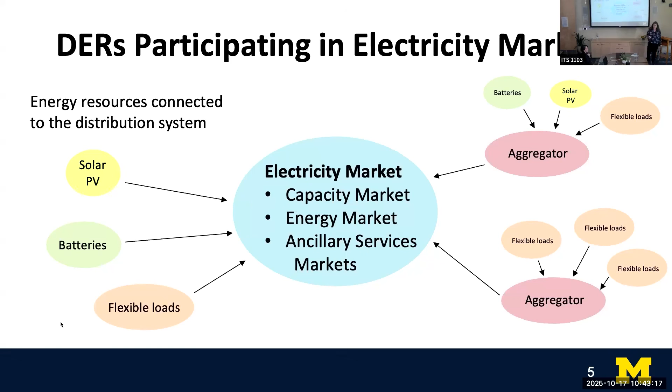Okay, so how does that actually work? So the way it would work is that an aggregator wants to interact with the market operator or the independent system operator. This is the entity that runs the grid. So the example here is the California independent system operator. So what they would need to do is say, I have this big resource and I want to offer it to the grid as a resource. So I'm going to bid into a market.

And then the market operator dispatches the resource to do something specific for the grid. And this happens in advance of real time, so often day ahead or hour ahead, this transaction happens. And then after the aggregator is dispatched, they're ready and waiting to actually deploy the resource.

And so the aggregator, in order to enable this, has to have a contract with different consumers. So the consumer could be a residential home, it could be the commercial building owner, it could be a big battery plant that's connected in distribution, et cetera. So the aggregator says, come join my aggregation. I will pay you for it. In exchange for that payment, you have to follow my commands when I'm deploying commands to change power consumption or production for your resource. So in real time, that control or coordination happens, but the contract is negotiated in advance. So they agree on terms.

And the consumer has a strong interest in protecting their equipment. So they'll also put in place constraints. It says you can't do this at certain times, or you can't do it too much because it might affect me. If the resource is a flexible load like an air conditioner, the consumer might say, I only want my house to fluctuate in internal temperature between this small range because I don't want to be inconvenienced. So that could be an example of a constraint.

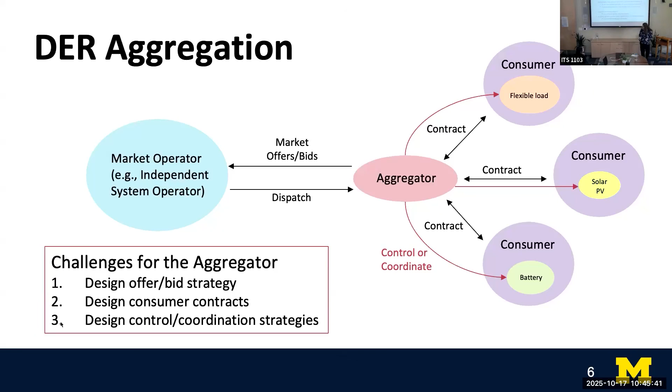And they also have to design a control and coordination strategy. How in real time do I actually deploy this resource to behave like a virtual power plant? And so most of my work actually focuses on this third one, the control and coordination piece. So when you dig into DER control and coordination, if you want to coordinate different distributed energy resources, you have to figure out how you're going to do that. What kind of mechanism are you going to use for control?

So you could send electricity prices: make the price high, it reduces consumption, increases production; make the price low, vice versa. Or you could send commands, you could say turn off, turn on, move to this state of charge. Or you could send instructions that are even more complicated. For example, you could say do this specific thing only if you can do it because your current operating state is here. You could do something more complicated, but that might give the DER more flexibility in their response.

Okay, so those are the many ways we can coordinate these DERs. Prices: a lot of people say we should do everything with prices and markets. We should deploy electricity prices that change over time, and we should get responses from resources based on prices. However, price response is less reliable because people have to be paying attention to the price in order to respond. And there's also the possibility that you could get synchronization through prices.

If everybody's seeing similar high prices at the same time, everything could change their production or consumption in the same way. So you have to be careful of that, because synchronization of behaviors across DERs can also lead to physical oscillations in the power grid where the voltages start to swing and the currents start to swing, and that could actually lead to a blackout if you did it very aggressively. And there have been papers that have shown that.

Commands or instructions, when you're more explicit and more direct, as to, I want you to turn off or turn on, or do this thing if you're in this state, are usually more reliable, but they need the consumer's trust, because many consumers don't want to give that level of control over to an aggregator. So those are the different options.

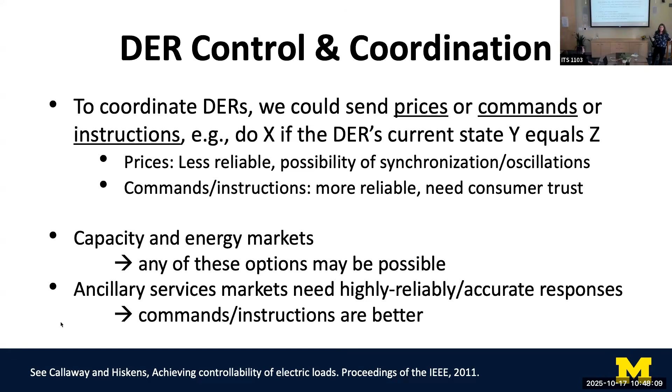Okay, so before I start to talk about my actual work in this space, I just wanted to provide this note. Recall the DERs include distributed generation, storage, flexible loads. In this talk, I'm going to use flexible loads in almost all of my examples. I've done work on storage and also solar PV, but I'm going to talk a lot about air conditioners, water heaters, and things like that.

So as far as I'm concerned, all the ideas I'll present today apply broadly to all DERs, although the specific instances of the models, the parameters, and the formulations may have to change based on what you're looking at. But I'll give you a lot of examples about loads, so make sure that you're also thinking, oh, this could be a battery, or this could be solar PV as well.

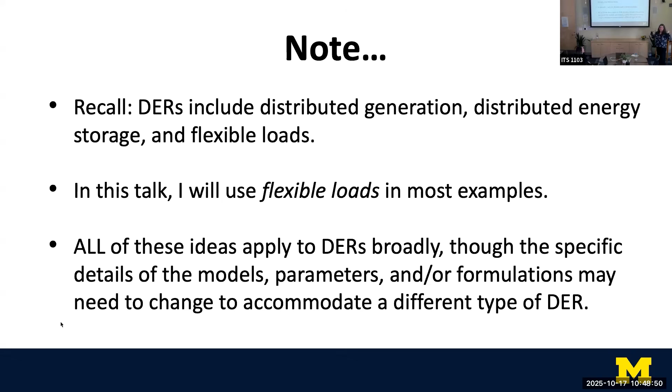Okay, so back to the outline. So let's talk about some examples of how DERs can balance the power grid.

Feel free to raise your hand and interrupt me at any point. This doesn't have to be me just talking at you, and I'm happy to stop and answer questions throughout, or just take them at the end, whatever you prefer.

Okay, so how can we balance the power grid? When we think about loads in particular helping balance the power grid, most people think about demand response programs, where you have a load responding to a signal from the grid because the grid needs a load reduction, usually. And so there's a lot of work on this about using different buildings to provide these types of load reductions, which are called load sheds.

This is a paper I wrote a very long time ago, when I was still a grad student at Berkeley, with people from Lawrence Berkeley National Lab, where we looked at how 3 different buildings were responding to critical peak pricing in the state of California. And the way those programs worked is that during the hours between 12 and 3, the prices went up 3 times, and between 3 and 6, they went up 5 times the normal price. And so it incentivizes load sheds during those hours.

And you can see the baseline is what we assume they would have consumed if they hadn't tried to respond. And the actual is what they did consume. And the difference is the residual. So you can see there's a load shed here and a bigger one there. And those are 3 different actual buildings in California.

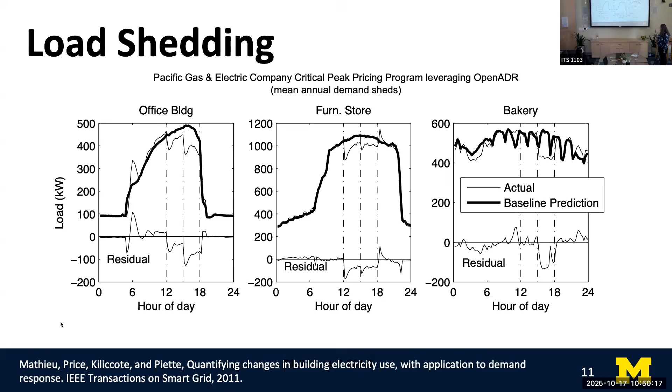The furniture store is the IKEA in Palo Alto, East Palo Alto. So you can see a lot of people work on this sort of load shedding. Load shifting is also something that we have buildings do to help balance the grid. In load shifting, instead of just reducing load, you're trying to shift it to another portion of the day when it's less critical that you reduce.

Go ahead. How do you evaluate the effectiveness of these measures when you look at the comparison between what actually happened and your prediction? The effectiveness in terms of the response to the event in this case? Yeah, I guess you've got what happened, you've got what you think will happen. How do you know if you got what you wanted to happen?

Exactly. So a lot of people compare to the baseline and then estimate the amount of, in this case, shift that you got and compare it to what you were trying to achieve. Maybe they didn't actually have a target for a shift, but they just wanted a shift, and then they can say, well, how much were we able to shift? A lot of people also do research on the accuracy of baseline models, which usually involves creating the baseline for days where you know the counterfactual, like the building didn't do anything, so that you have the ground truth.

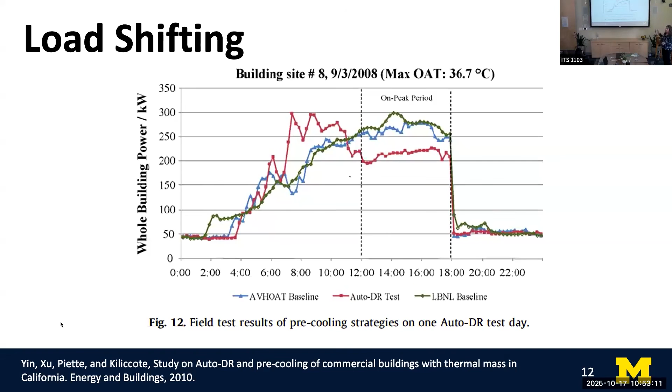So I would say load shedding and shifting are the old way of thinking about this. The way we think about this now is a much more active type of control paradigm. So in the other case that I was showing you, we were sending an open loop control signal to these resources, these buildings, and having them do something, and hopefully they respond.

This is showing a simulation of a feedback control where we're having a bunch of, in this case, air conditioners collectively try to track the output of a wind farm. So the wind is going up and down, and the air conditioner consumption is trying to go up and down with the wind. And this is in simulation. This was by Duncan Callaway in 2009, where he was showing that this was possible and that we should be using these resources in more advanced ways because they could do a lot more for the grid by doing this level of balancing of the grid.

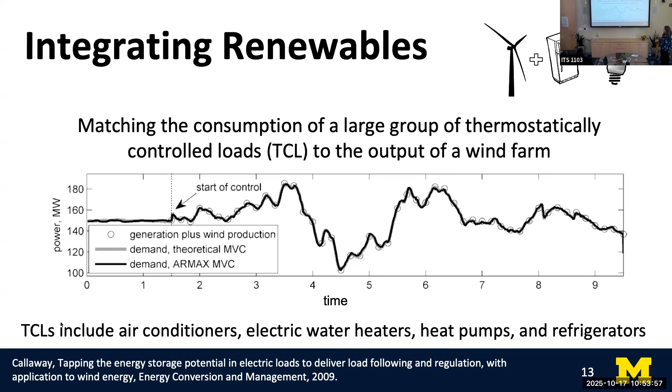And this was actually deployed, in many cases in pilot studies only. For example, in 2011, in PJM, which is the grid in the mid-Atlantic region, they used water heaters that look like this to track frequency regulation signals.

So I'm going to talk a lot about frequency regulation, but to give you an idea of what that is, the frequency of the grid is always changing a little bit, and that change is basically representing the mismatch between the supply and demand in the grid. So if there's too much supply in the grid, the frequency will increase. If there's too much demand, it'll decrease. We want them to be identical. It would be easy to solve this problem if we had lots of energy storage, but we don't. And so we're always changing generation to match demand.

So the residual piece that is hard to fix, because we can't get this exact matching, is attempted to be dealt with in the frequency regulation market, where you're asking power plants to increase and decrease their production every 2 seconds or every 10 seconds. It's on that time scale, depending on where you are in the country, to be able to fix the frequency and send it back to 60 hertz.

Could you just repeat when the frequency drops versus when it's higher, versus supply and demand? If there's too much generation, the frequency increases. If there's too much load, the frequency decreases. Okay, thanks. And too much relative to each other. So you're saying the signal comes at a rate of like 2 to 10 seconds? Yeah. So what's with the intervals that we're seeing on the graph on the slide, then?

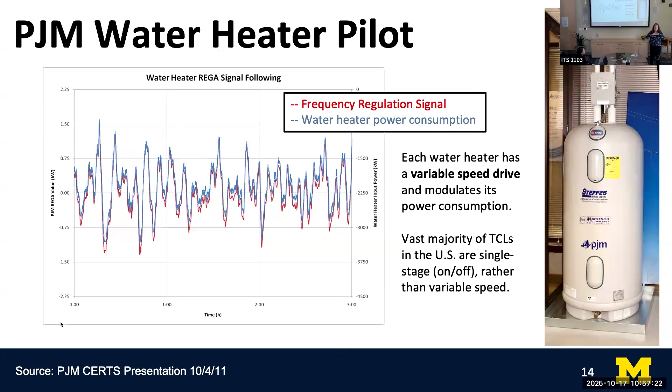So if you can continuously control power, you can do this well. But how do you do it if all you have is a device that is on, off, on, off? So an on-off device, which we'll call a thermostatically controlled load, a load controlled by a thermostat, which could be a water heater, a heat pump, refrigerator, freezer, all of these sorts of things,

works like this. So the axis here is temperature. This is the temperature set point that you set. And then there's an on-off state here. So the temperature that you set is your target for your home, for instance, if it's an air conditioner, but you're actually going to cycle plus or minus some small number of degrees. It's never going to be perfectly there.

And so the way this works is that, let's see, if it's warming up in your house, eventually you'll hit the top of what we call this temperature deadband, this area within which you want to cycle. You'll hit this higher temperature, you'll switch on your air conditioner, and the air conditioner will cool your home, and then your home will hit a lower temperature bound and turn off.

And if you look at how that's consuming power, it looks like this in pulses. So it's off, it's on, it's off, and then it keeps going. The cool thing about these resources is they already have built-in flexibility, because you're perfectly happy as long as the temperature is within this range. You're not going to notice because you're used to that anyway, it's always cycling.

So the flexibility that you can harness if you're an aggregator is that you could say, the house is warming up, but now I want to consume more power. Maybe I have a gust of wind in the system and I want to consume that. I want to take it out of the system. So I turn it on a little bit early. And then we're cooling down the house, now that gust is gone and I need to decrease consumption. So I'm gonna turn it off a little bit early. So as long as I stay in this range, I'm okay in terms of the house being the right temperature.

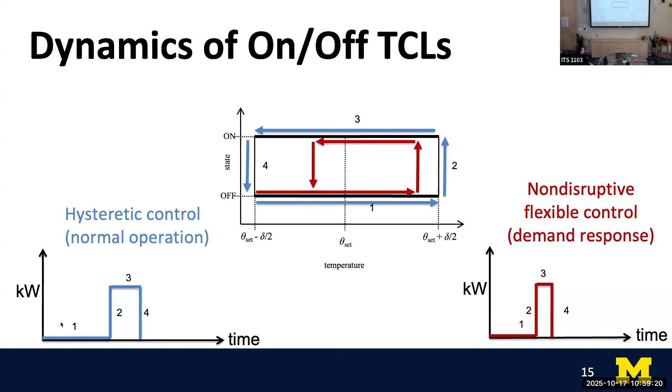I don't want to just be always cycling really fast. Do you know why? On and off, on and off, on and off. Yeah. Burn out the motor. Yeah, you burn out the compressor and the motor, exactly. So there are limitations, you can't just arbitrarily cycle. It's actually the case that if you turn it off, it usually has to be off for at least 2 minutes and sometimes more, just because it's pushing fluid through the compressor.

Did you have a question? You just answered it. Okay.

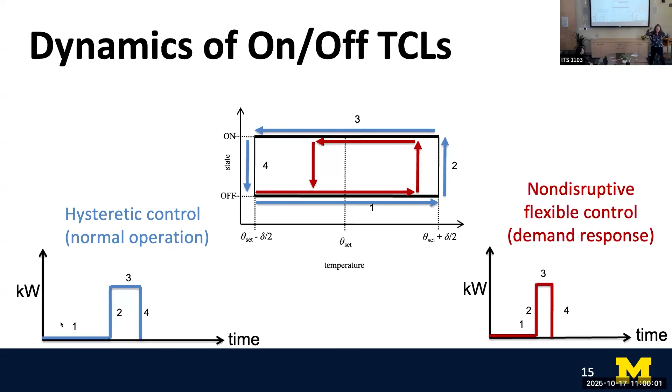Yeah, so there are limitations to this, but there's inherent flexibility built into these resources. So now this shows that instead of it looking like this, I can make it look like this, but that still doesn't help me track that very dynamic signal I showed you before. But now imagine I take hundreds of these together and I have them all do these pulses, but do them in different ways. So they each have a different pulse. So collectively they can change their consumption.

So that's the feedback paradigm that I'm describing, where you have a controller controlling a very large number of resources, hundreds to thousands. If I didn't control them, they would consume this blue line over time. I want them to track a signal, this balancing signal, which could be a frequency regulation signal. And so if I control them in ways to shape those pulses collectively, they can track that signal fairly well. That's what I'm showing in this slide. Does that concept make sense?

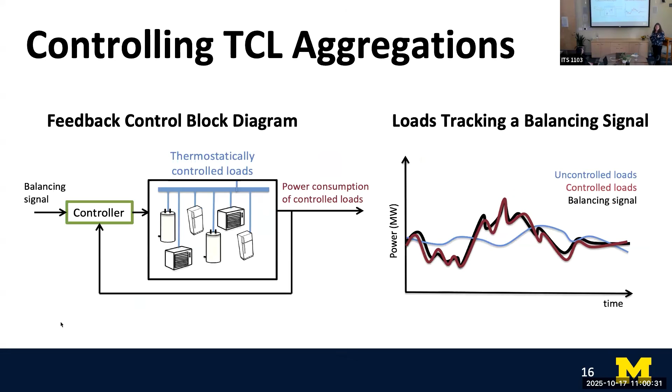Okay. So this idea is actually what I worked on during my PhD. I developed a controller to do this, but it took 10 years to implement this in practice, and that's what I'm going to show you next. At this point in my presentation, I often get questions like, this seems like a tiny resource. Like, why don't we just build a bunch of grid scale batteries and get this job done, right? It's actually quite a large resource if you can harness the technical capacity in the system.

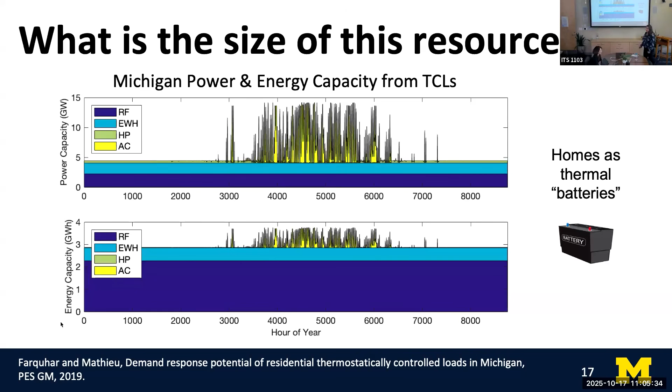I'll read the questions online too. So the question from online is, for the frequency regulation signal, is that sent out to the DERs or aggregators from the utility? And is that signal the same for all resources participating, or is there a unique signal to each aggregator, for example, based on what capacity they have to respond?

Yeah, that's a great question. The signal is sent out from the independent system operator, not the utility. So that would be CAISO, MISO, ERCOT, New York ISO. Those are examples of system operators. The utilities actually aren't involved in this kind of wholesale market piece of balancing the power grid.

And is it the same signal? So it is the same signal sent out to all resources, but the resources scale it by their capacity to respond. So every resource will have a different capacity of its response, but otherwise it's a unitless signal. And then you multiply it, like if you offer 10 megawatts, you multiply it by 10 in your case. So the aggregator gets the same signal as everybody else. And then the aggregator can disaggregate that signal to send different signals to different resources if they so choose.

Because they might know that I don't want to ask this air conditioner to respond because I know today that one's not on. So I'm not going to send that one anything, or I'm going to send different signals throughout. But they get to choose how to do that.

So the way we address this problem of designing and building and deploying this system was we built a simulation test bed where we could simulate an arbitrary number of air conditioners using very high fidelity models of air conditioners. We also modeled the distribution networks and the communication networks, and we made everything very configurable so that we could change it. And it doesn't have to be 1,000 air conditioners; it can be as many as you want.

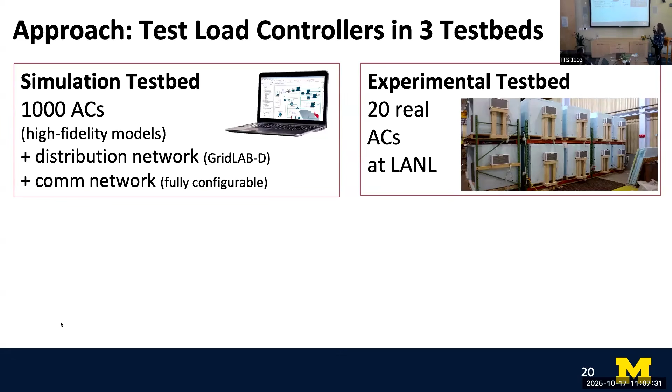And then we built an experimental test bed at Los Alamos National Lab. So the picture might be a little hard to parse, but each of these blue boxes is a model home. And the homes are stacked because we didn't have very much space. And each of the homes is cooled by an air conditioner and also has an internal heat source that was actually a water heater that we're using to emulate the internal heat load in a home.

And we actually implemented all of this and controlled everything through a LabVIEW interface, working with staff scientists at Los Alamos. And then we did a field test where we were working with partners at Pecan Street, which is an Austin, Texas-based nonprofit that does a lot of demos and energy work with a specific, relatively new community that was built in Austin maybe 15 years ago. So a lot of the homes in this community have solar on their roofs and are just happy to sign up for demonstration projects. So it's a great group to work with.

So we enrolled about 100 real air conditioners, and we built a bunch of hardware and software, and I'll explain a little bit more what that is. But the hardware was pretty minimal. We're basically just trying to emulate people's thermostats. We used data from the field test bed to validate the experimental test bed and the simulation test bed.

We were also able to run experiments on the experimental test bed that could be much more aggressive than the ones you can do in the field because you didn't want to upset these participants. But here you can do whatever you want because there's nobody there. So we learned a bunch of stuff from those very aggressive experiments and used them to improve our simulation test bed too.

And then we close the loop. Now if we want to control a population of air conditioners, 100 air conditioners isn't actually enough. If ARPA-E had given us another $5 million, we would have done probably 500 air conditioners, which actually would be a big enough resource to participate in the market. 100 is probably not enough.

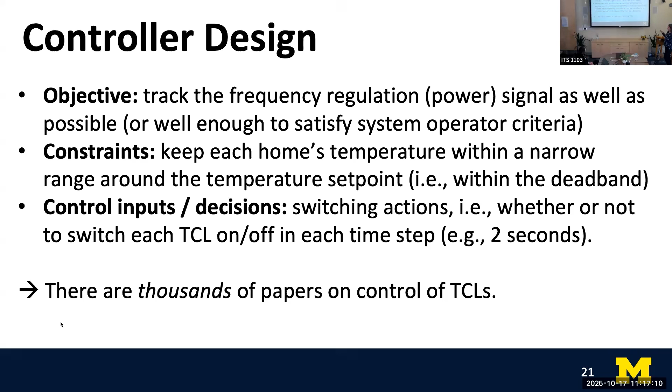There's a lot of papers on this. There's thousands of papers that develop different methods of control. I'm going to just mention two quickly to give you a flavor that they can be very different. There's an approach called packetized energy management, which came out of the University of Vermont. I say and subsequent publications because they have at least 20.

You can read all about this method, but the idea here is that the desire to switch actually comes from the consumer. So an air conditioner that wants to turn on or is about to want to turn on says, I want to turn on. And the aggregator decides how many requests to accept to shape the load. So you have to start requesting to turn on before you absolutely need to turn on, so that you don't get into a situation where the home temperature goes outside of range.

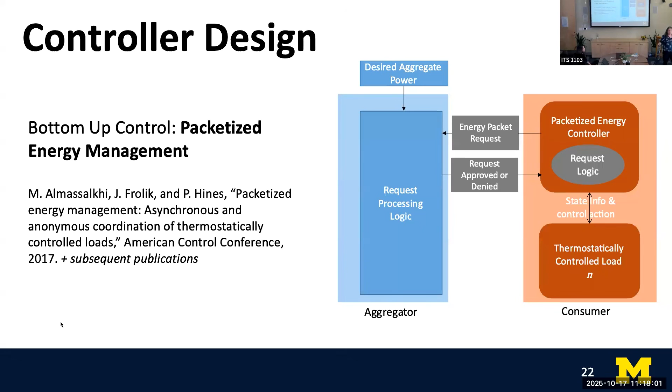So you start asking early and you hope you get deployed. And then eventually, if you get to a point where you just have to turn on, you turn on. But the aggregator has control because they choose how many requests to accept. And this is an anonymized sort of process. They don't know who's asking, they just select randomly. So that's one way of doing this.

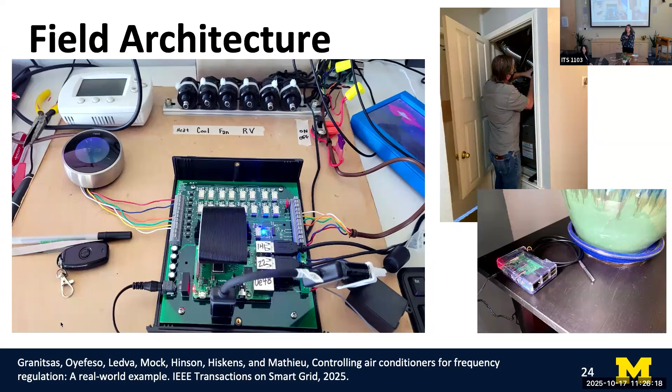The thermal model that we're showing, is there any supervisory control behind that keeping it between the bounds? What is the control method? This controller is modeling this state space, and that embeds the bounds. So suppose I model this space and I want to keep temperature between two bounds. I have to put some control there to make sure those states are not going out of those bounds. So what kind of algorithm is there?

I'm struggling with how to answer. Okay, so this is your thermal model. Let's suppose this is the thermal model of this space. This is the thermal model of hundreds of this type of space, like 100 or thousands of this type of space.

Exactly. So imagine we keep the room here between 70 and 72. The room will always be between 70 and 72. I hear the air conditioner on right now. But the thermostat in this room will just switch the air conditioner on and off and modulate the temperature all the time. And that's what it's doing.

Actually, this room's not a good example, because this is a different kind of air conditioner. Okay, there is no feedback control on the air conditioner itself then? It's its own control on its own set point. So when it reaches its set temperature, it turns itself off a bit. Just the way the air conditioner is working.

The way the air conditioner is working does not change. We're just changing when the thermostat tells it to cycle on or off. That's all. So we don't do anything to the air conditioner. The air conditioner receives controls from the thermostat, and we're just slightly playing with the timing of the cycling. Yeah, back there, and then I'm gonna move on.

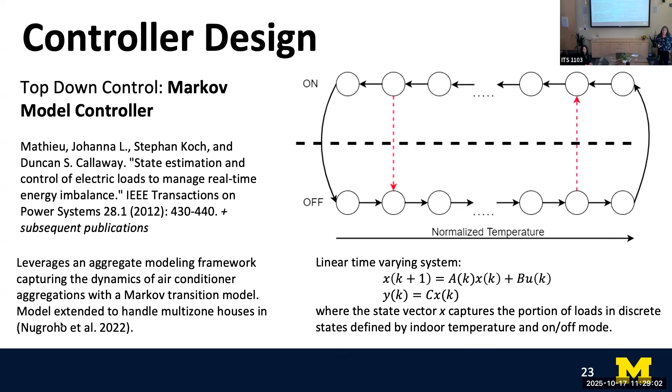Or I can force it, by saying anytime the air conditioners are in this state, I force them on because they have to be. So you can make it come on early, but you can't make it come on later because you're maintaining the band. Yeah. And it's a decision. You could make some choices to add more flexibility and that would give you more capacity, but it would be a trade-off for the consumer. So here we're saying no, but it's a choice in control design.

And we did 4 different runs of that test in 2023, and we computed how well we can track that signal. PJM, which is the system operator in the Mid-Atlantic region, requires these scores to be 0.75 or higher. That's a metric for how closely you're tracking the signal. And we found for each of them that we're well beyond it. So these air conditioners are capable of doing at least as well as a power plant.

So it works if you trust our hardware-in-the-loop simulation piece of it, because it's half simulated, half physical. But again, they're working together in real time. We're not just using the simulation after the fact to correct the physical. And then what's the effect on the end user?

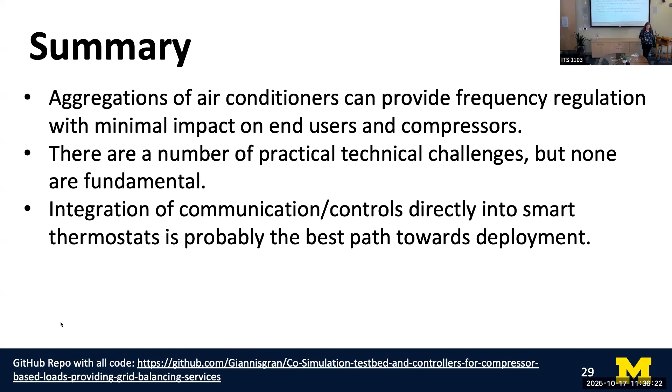And that, again, you can do this all within a smart thermostat. It's not a fundamentally difficult communications or hardware challenge. It's more of a software coordination control challenge. And we put all of our code, including our simulation testbed and all of our controllers, in a GitHub repo, which is open source, so you can use it if you like.

You've asked so many great questions that I think I'm just going to give you the highlight of the last section and not go into too much detail because I want to leave room for more questions. But the last part is I just want to talk about other challenges that we work on. So specifically impacts on distribution systems and how you can get the utility involved, because there was a question about what is the utility doing here? You're talking about the system operator, which is like the market operator, but the utility like PG&E, they're going to care about this too because it's going to impact their network.

So that's what I've been working on for the past 5 years. Actually, this other work was like 15 years old, plus we finally got to demonstrate it 2 years ago. And now this is actually the more intellectually stimulating piece, I think, right now. So we all know that if there's too much solar PV in the system, it can cause problems, right? You put too much solar PV, the voltages increase, the power can flow backwards, which the system wasn't designed for.

If you have too many electric vehicles connected to the system, the voltages can decrease. It can also overload transformers and cause heating problems, which then can make them have a reduced life. All of these things can also happen if you coordinate DERs improperly. So if you synchronize them and they're all on at the same time or off at the same time, it's a little bit like having too many EVs or too many photovoltaic injections into the network.

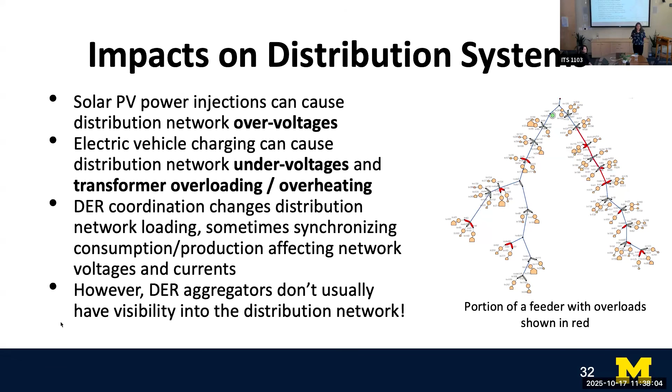But the problem is most aggregators, so we've talked about how car companies can be aggregators, or thermostat companies can be aggregators, but other companies can also be aggregators. They don't have any visibility into the actual network because they're not the utility. And the utility can't share that information with them, because the utility has to protect that information for privacy and security reasons, because they don't want people to attack these networks. So there's this issue of who knows what and who's affecting what.

And so as an example, if I have a bunch of air conditioners and I'm controlling them, and normally they would consume this much power, here they're consuming this much power because I'm using them for frequency regulation, it causes fluctuations in voltage. So we have 3 different cases here where the base load in the network is low, regular, and high. And you can see sometimes those fluctuations lead to voltages outside of these red bands, which are the nominal limits of the system that you need to stay within.

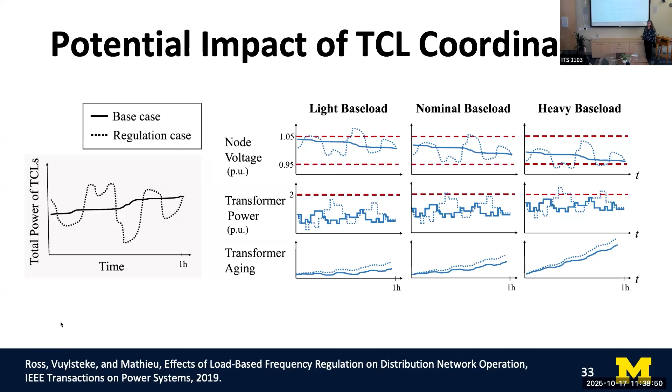So if the voltage goes too high, it could damage equipment. If it goes too low, equipment won't turn on. It also can cause overloading of the transformers, which leads to transformer aging. Okay, so all of this can happen. So how can we avoid these types of issues? So one way to avoid it is to ban aggregators. And that might sound crazy, not have aggregators. We don't want them on our networks.

California used to ban aggregators, but they came back many years ago. Michigan banned aggregators until very recently. But then the federal government put in place an order called FERC 2222 that requires independent system operators to let distributed energy resources participate in electricity markets. So states that had these laws banning aggregators had to remove them from the books because now they're not consistent with federal law. Again, there's a lot of caveats to that. So if you're in certain parts of the country, that doesn't apply.

But where you are and where I am, it does. So now Michigan has to figure out aggregators, and the utilities are afraid because they don't know how to interact with these companies that are going to start to impact their networks. And then there's this global conversation about this because we're talking about this everywhere.

In Europe, they're talking about transmission system operators and distribution system operators having to work together. So for us this is our independent system operator and our utilities. They need to work together. So they're actually thinking about it as a coordination at the highest levels of grid operation.

In Australia, they're thinking about it bottom up, where Australia has a lot of solar PV and it's leading to problems in distribution networks now. So the utilities are constraining the solar PV injections into the grid at certain times when it causes problems by using a concept called operating envelopes. So basically saying, you have to curtail your solar PV at this time because you would cause problems if you didn't. And they issue these envelopes which change over time based on the network conditions. So that's what they're talking about.